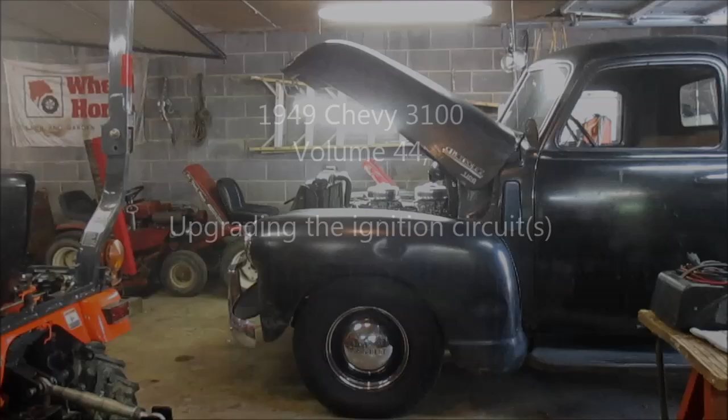Today we're going to get back on this 1949 Chevrolet 3100 pickup truck that has a 1954 235 engine that's been slightly modified and bored out to 244 cubic inches. As I hinted before, we're going to do a modification to this thing and perhaps get a little bit more out of it. So stay tuned and let's get busy.

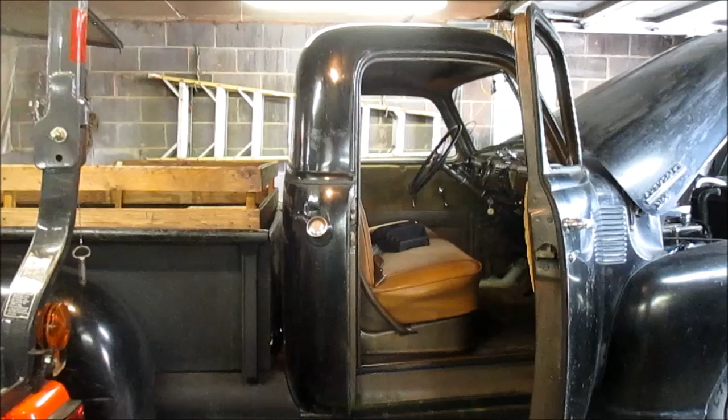And any of you souls that are still with me after that, I'll give you one more hint of an upcoming vlog. I had an aftermarket provider approach me that are going to want me to try out one of their products on the Chevy here. So I'm going to be doing that probably in the next two or three episodes, or vlogs. I'll tell you some more, but right now I don't know the full details of it. We're still in the talking stage. So as I find out more, I'll let you know. But that'll be upcoming, and it should be an improvement on this engine as we have now.

Well, all right. I've made a few hints about this, so I guess I ought to get right to it. My package came in today, and I've been communicating with the aftermarket provider. And I'll show you what I got, and we'll talk about it. Get that out of the way. And let's see. A little bit of paperwork that I've already gone through some. Let's see here. A Flamethrower coil. Very hot, okay.

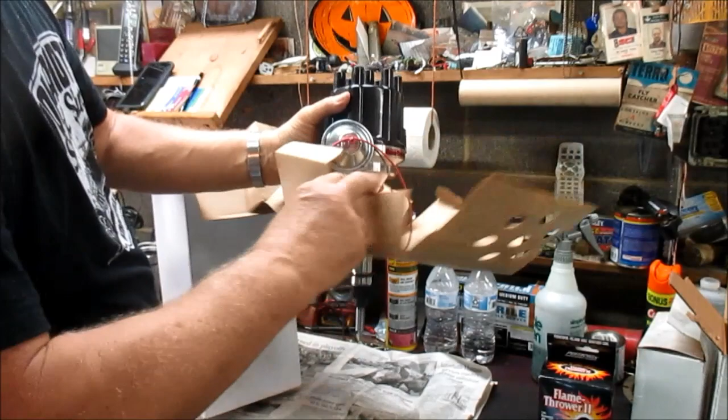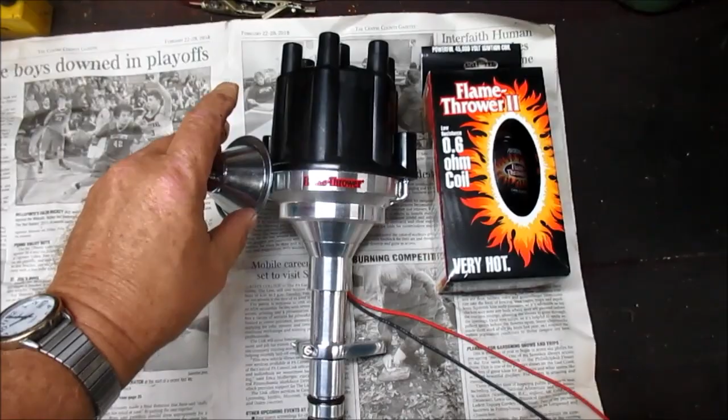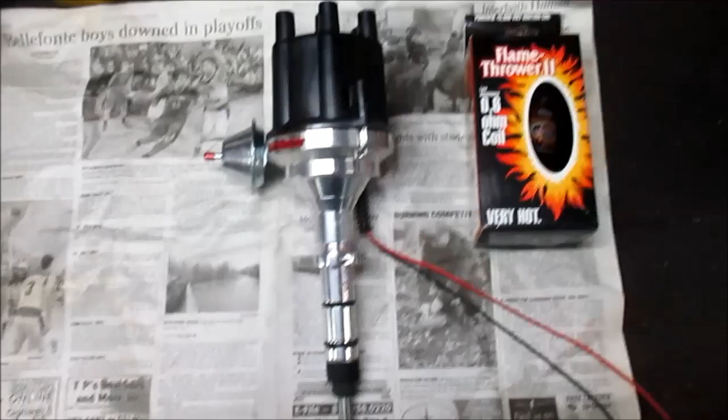And a new distributor, an electronic distributor designed to work with the Stovebolt series of engines. It's a Flamethrower electronic ignition distributor with the adjustable stop, and it's the Flamethrower 2 coil, high power coil, I guess. They did not include any plug wires, but this is good enough to get me going, and I'll tell you here who the they is. Alright, if you look there, you can see the electronics of it. You see it says Ignitor. Have you guessed who it is yet?

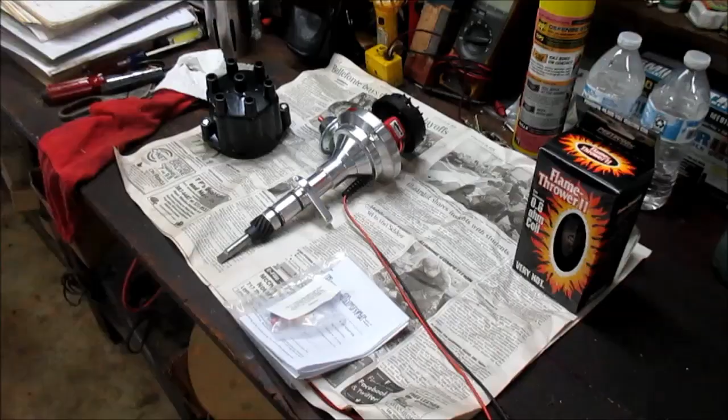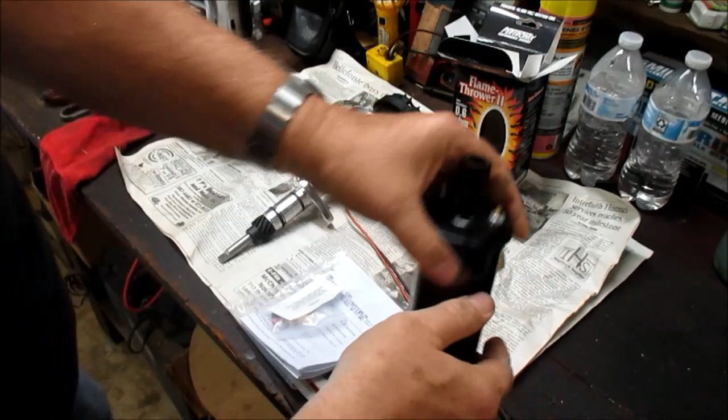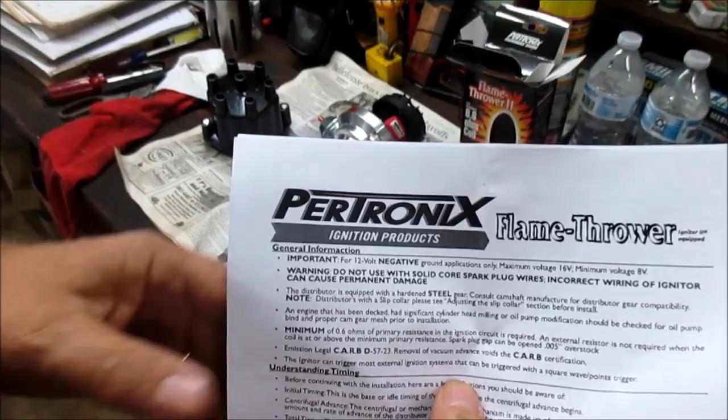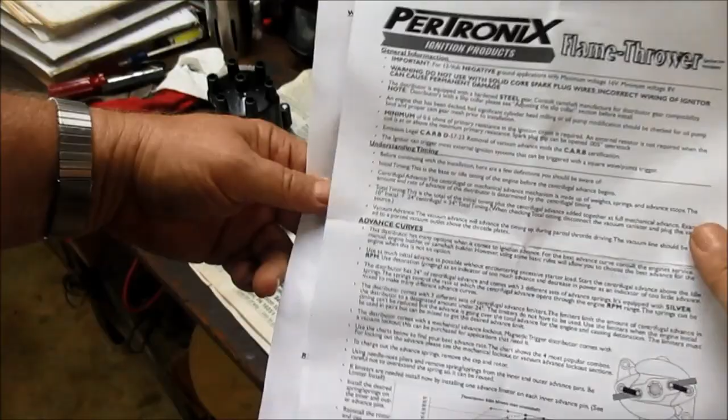Alright, let's unbox this coil and take a look at it. 45,000 volt. Okay, that's cool. It's good, and it's black. That'll go along with my color scheme. Marked correctly. Even comes with its own instructions. Good deal. And here's the paperwork that came with it. You ready for the big reveal? There you go. Pertronix. And there it is. Some of the paperwork that comes with it. Documented pretty good. It's not specific to the Stovebolt engines, but it's a good general that'll actually work with anything.

All right, as some of you may or may not be aware, I had a 72 Volkswagen Karmann Ghia that had the 1600cc engine that I went with a Compufire electronic module to do away with the points, and it worked fine for the couple years I ran it before I traded it for the 49 GMC truck. Well, according to their website, they own or make the Compufire modules too. So if this Ignitor 2 is anything as good as that, I should get some good service out of it.

All right, it comes with some really good instructions, and it's got this little kit with it, and basically it comes with 3 different sets of springs that control the rate at which the mechanical advance flyweights expand out and at what RPM. And they're color coded. They're silver, brass colored, and black. And it comes with the silver pre-installed, which is sort of in the middle. So that'll allow you to play with the advance curve if you so desire. And it also has limiters, and they're rated. I believe there's 3 different sizes that'll limit the amount of maximum advance that they will spread out. So that's pretty good too. And then you got some terminals.

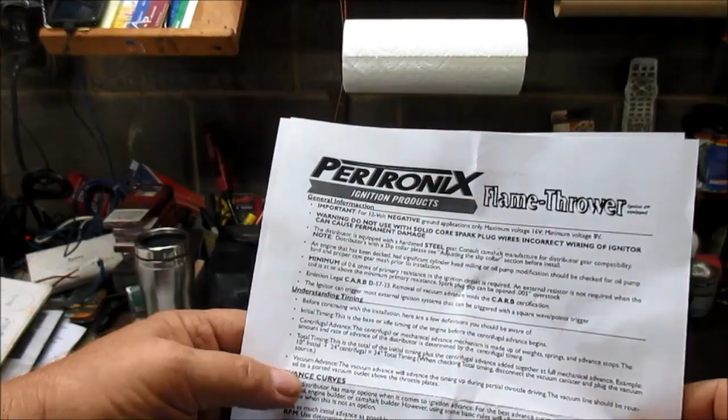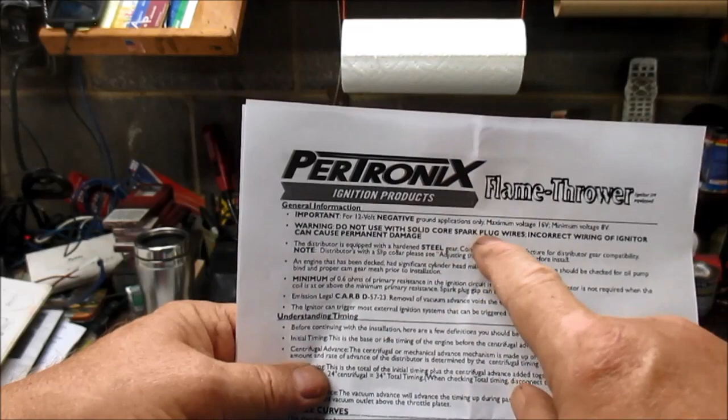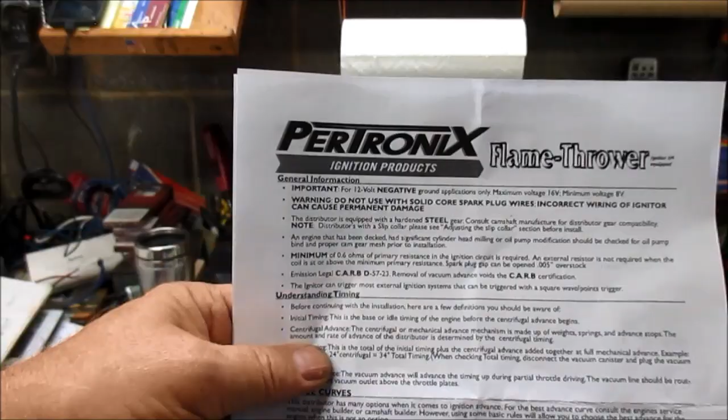So that's the kit. You know, it's a shame I don't have one of those Sun distributor machines, because I could really dial this thing in. But I think at this point I'm going to run with the silver springs that come pre-installed on it, and we'll go from there. Like I'm saying, the instructions are pretty good. There's some bolded type, which to me is kind of like the red that's in the Bible. You really want to pay attention to it. And in this case it says not to use it with solid core spark plug wires, and that's what I'm running. So I've got a set of HEI type plug wires coming as we speak, and I have another set laying around here spare I just discovered, so that shouldn't hold me down. But that's a big highlight.

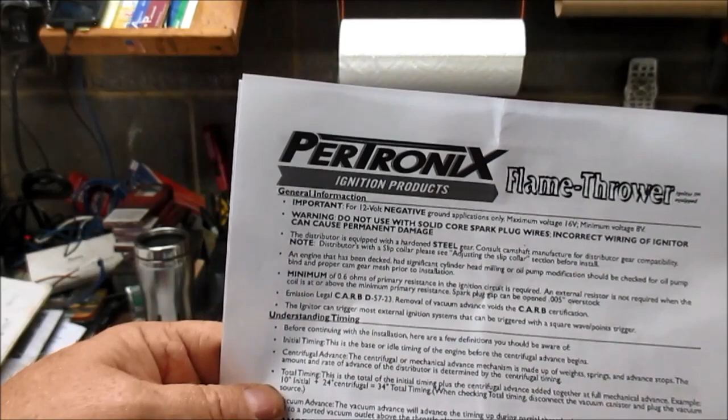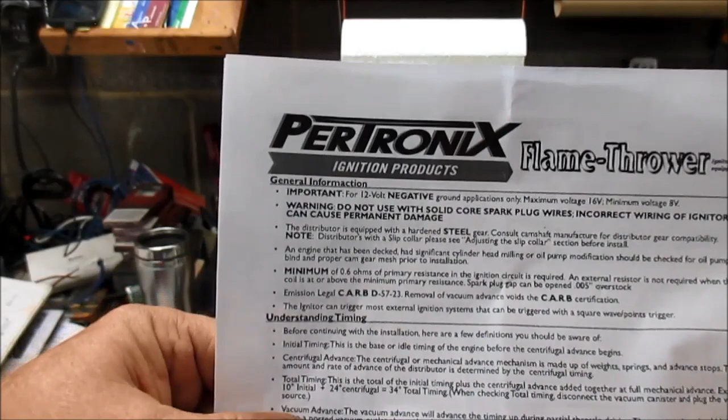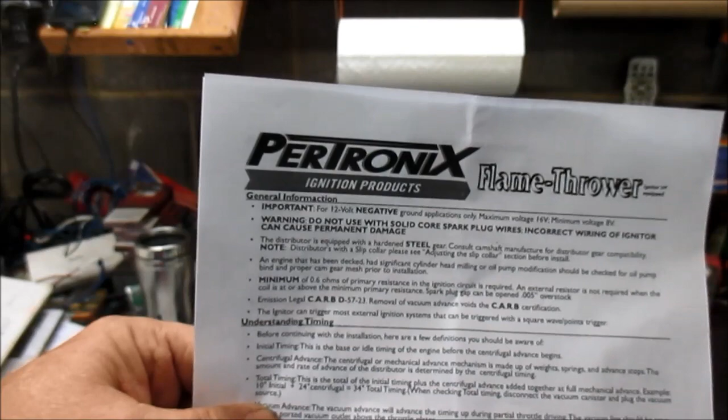And also there's a highlight right here, and it says the drive gear is hardened steel, which is also similar or the same as melonized. So I've done some research on that, and I'm going to pop up a graph that's going to show what the cam material is made of, which determines what gear the cam should be turning on the distributor. Now in 1954, well here's that graph now.

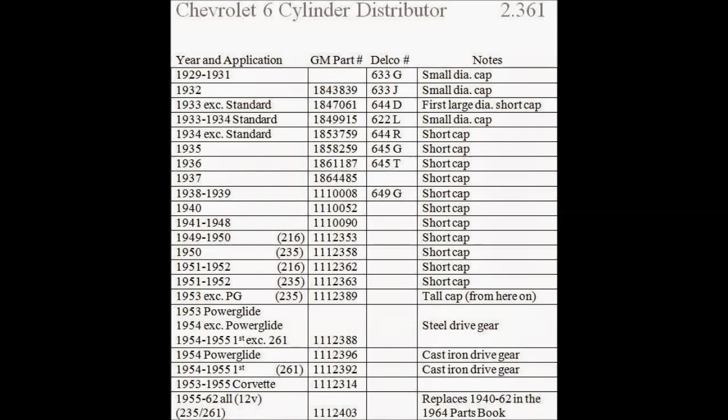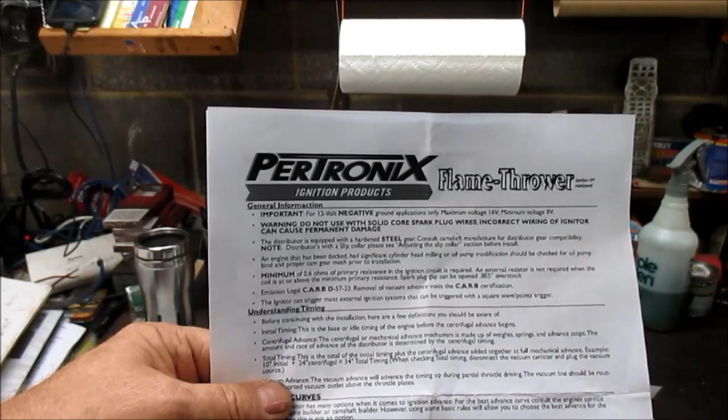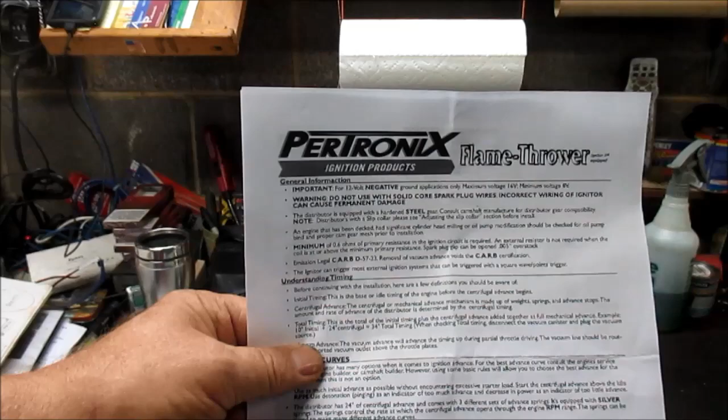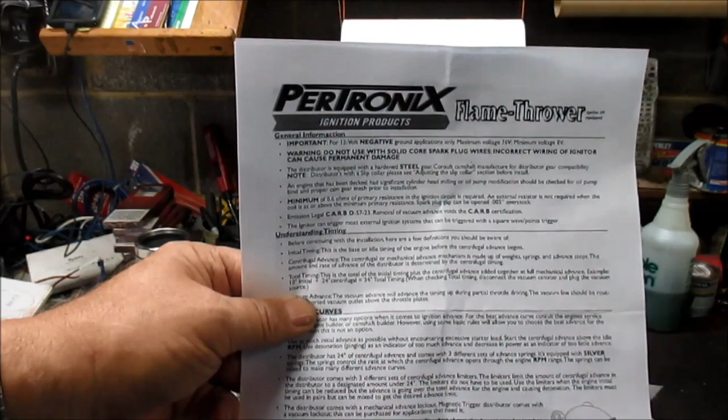Now, in '54 Chevrolet and earlier, Chevrolet used a steel cam, so a steel drive gear was used. In '54, the solid lifter truck engine used the steel gear, and the '54 Chevrolet car engine, which had hydraulic lifters, used the cast iron drive gear. Now, according to all the information I've got, and I'll post that up here as a little caption.

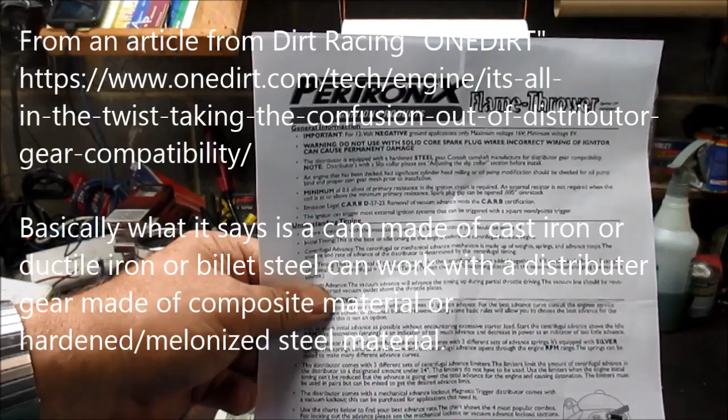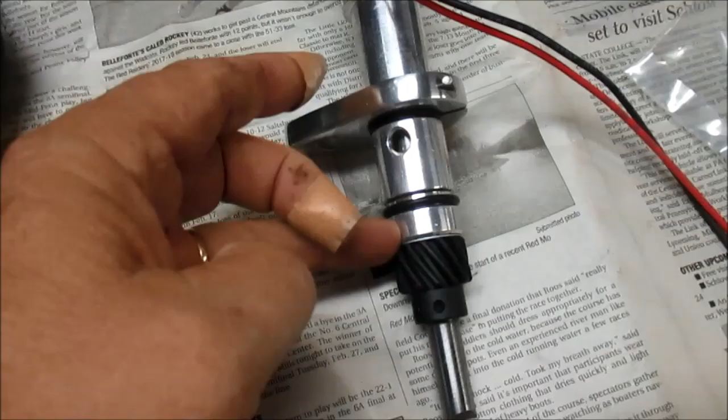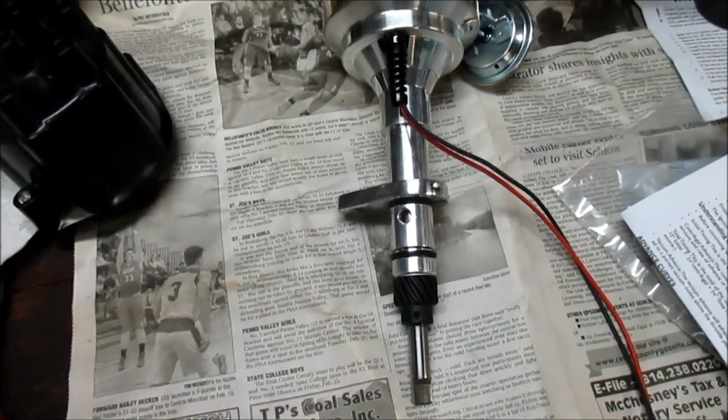The Pertronix, according to this, is the hardened steel gear, which is also the same as the melonized. And here's the gear here. According to all the information I can gather, the hardened steel or melonized gear can be used with the cast cam. So I don't see a problem running that.

But I also happen to have another distributor that I tried in my 235, and it wobbled, so I decided I wasn't going to use it, and I just rebuilt the stock one. But the gears look almost the same. Here's the Pertronix Flamethrower on the left, and here's the aftermarket rebuilt '54 distributor on the right. As you can see, the gears look the same.

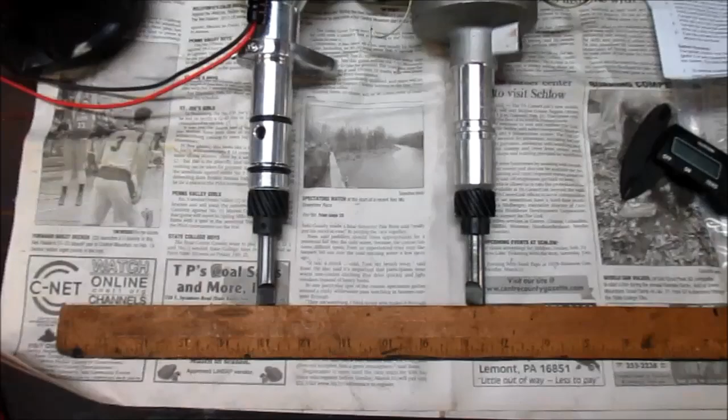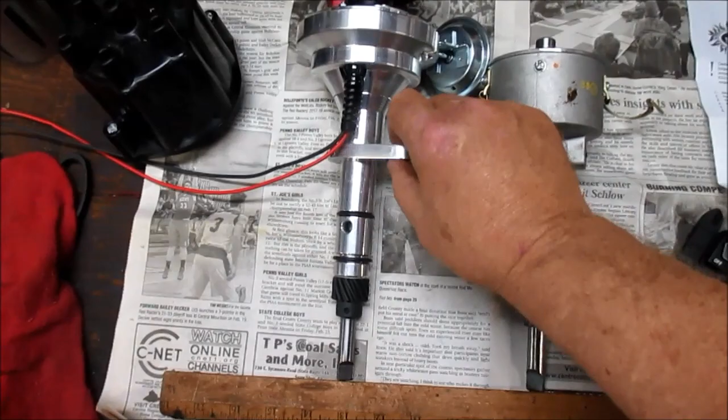I ran this all during break-in and testing of the cam, and I didn't have any problems with it. I probably got maybe 500 to 1,000 miles before I decided I'd redo the stock one, because it was just wobbling, and I didn't like the wobble. But anyway, I'm gonna do some measurements to make sure on the tang, and from here to here, and from here to here. This is adjustable, the stop, which is good.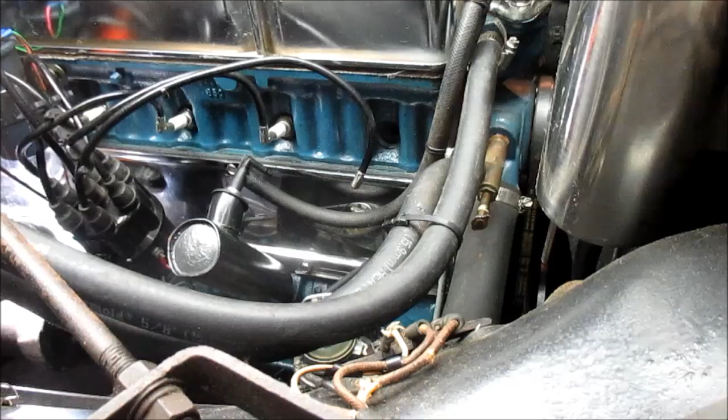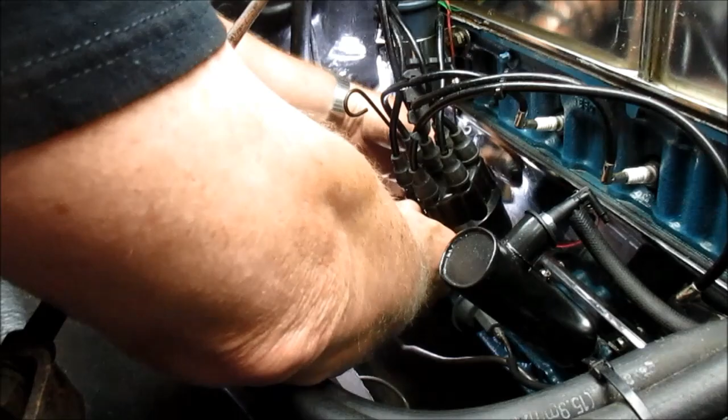Alright, the next step is to find top dead center on number 1 plug. There's several ways to do it. I believe in the easy way, so I'm going to let compression blow that out when I spin it over, and I know it's getting close. You can do it by hand, but I still got real good compression on this engine. Like I said, my fingertips are just shot on my left hand.

So, wow, it won't come off, did it? Right now, I just want to see how far I got. Well, it's almost lined up. I should be able to spin that by hand, because it's got to come to here, and it spins clockwise. Let's see if I can spin it by hand. Alright, I didn't show the procedure because I knocked the camera over, so it wasn't any good anyway.

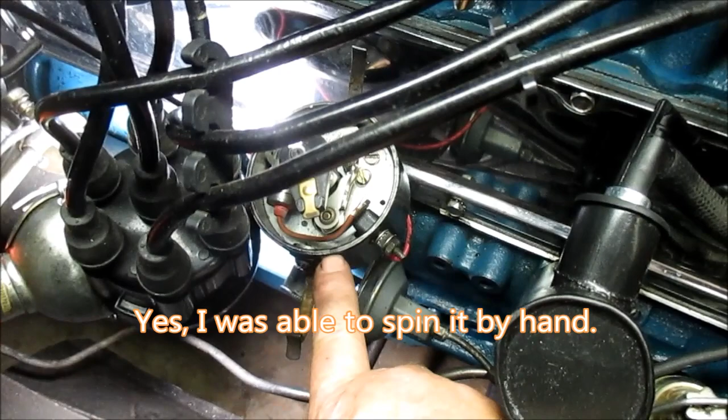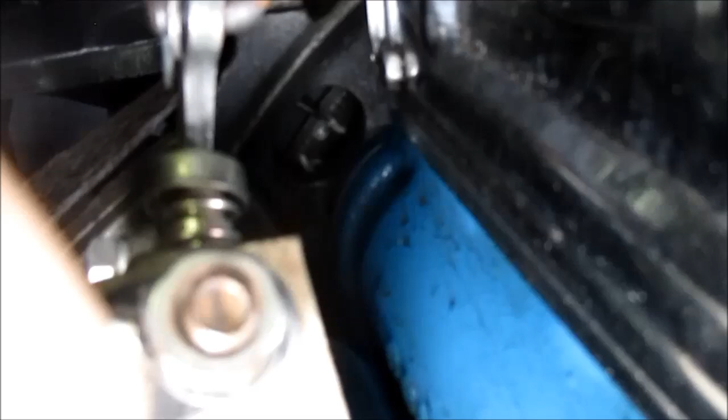But if you notice, I made a mark a long time ago on my distributor, so the tip of the rotor is lined up to number 1 there. And we'll come down over here, and I hope you can see that. The pointer is on the line. Now you see that white dot just to the left of the white line? That is the normal stock 235 timing setting, which is 2 degrees after top dead center.

Well, this engine's modified, and so that white line is true top dead center, or UC, I think they call it upper center, that's etched on the flywheel, but that's top dead center on cylinder number 1. We're going to set the distributor in off that, then we'll adjust the timing. Alright.

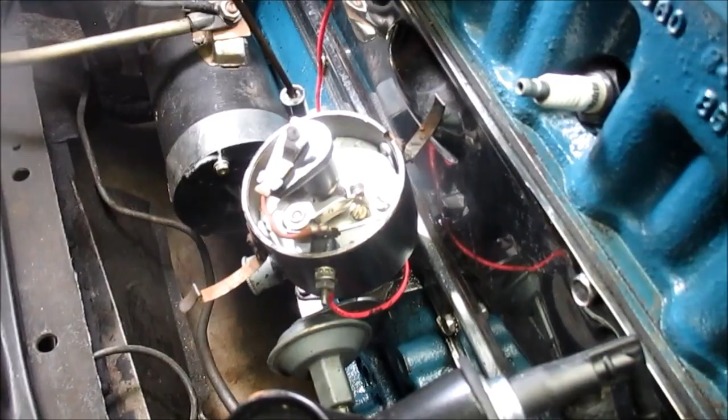Normally, if you're removing the distributor just to install the points, you would loosen this screw right down here and leave the vacuum advance assembly attached, and you can just slide the distributor out. But in this case, since I'm not reusing the vacuum advance or the distributor, I'm going to remove this octane adjustment bolt here and lift the whole assembly out. Alright, so 11/32 is the wrench.

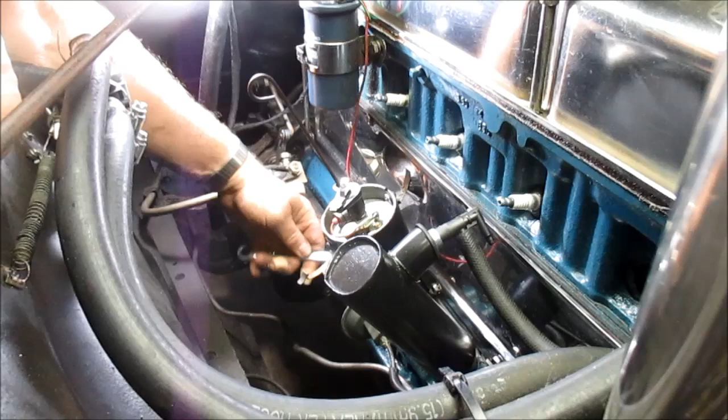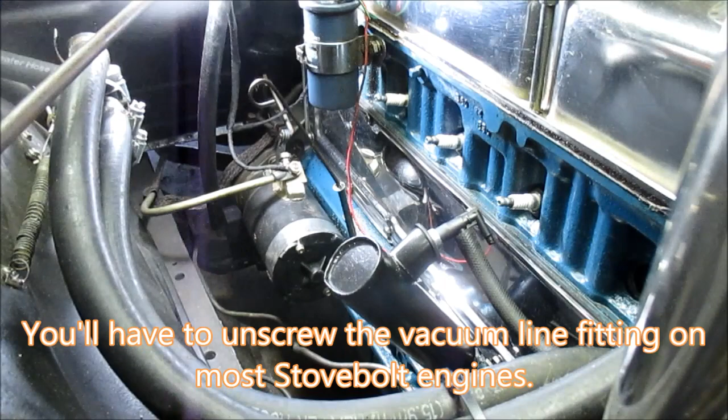Actually I could have taken it loose up here, because I won't be reusing that. Alright, I'll loosen this with my fingers. Alright, here we go. The tang will be pointing that way also. So we'll just unplug the vacuum, and out she comes. There's a bunch of oil on it. And look at that, that's a steel gear. That's the original gear that came on it.

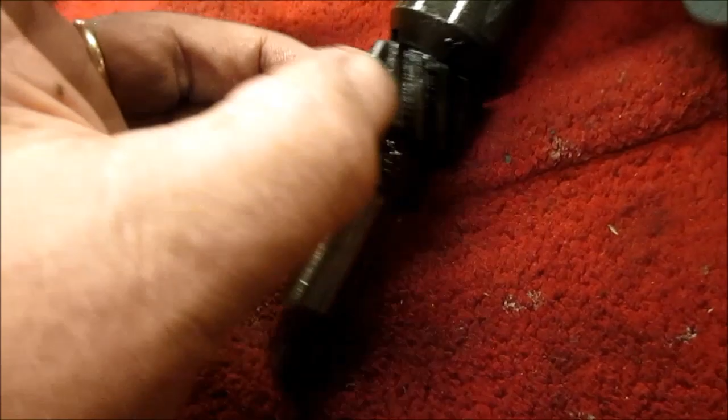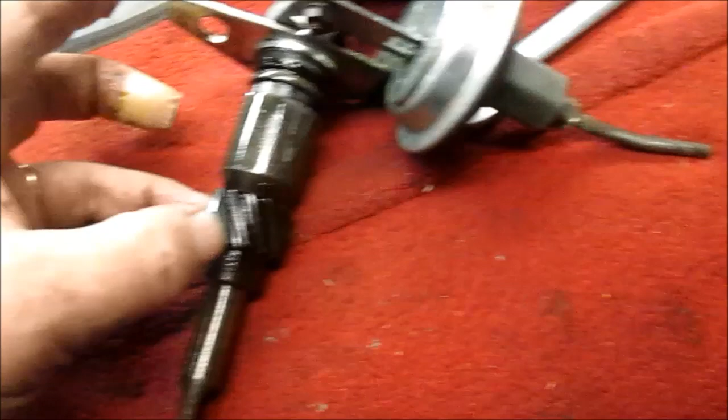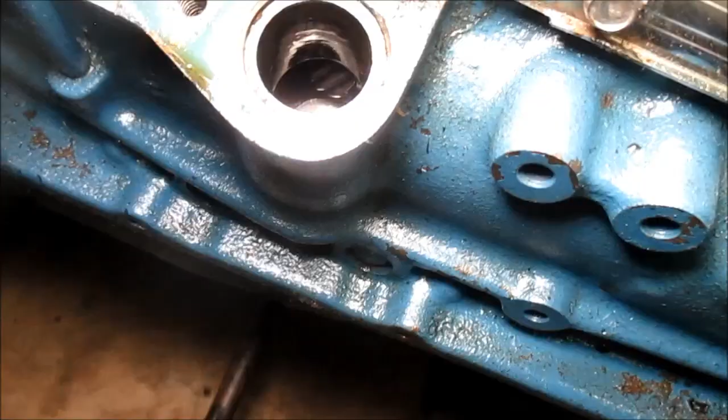Now, see, this is an aftermarket cam, so the possibility that the cam is forged steel is probably not. I think the 261s were cast, and this is probably a modified 261 cam, unless they cast it brand spanking new. I don't know what the aftermarket does. I'm gonna see if I can look down in that hole and see what the cam gear looks like. I doubt you can see, but it doesn't look eat up or anything. It looks okay, best I can tell.

Of course, I'm not seeing the whole gear, and I'm not going to spin it. So I believe we're all right. We're going to go with it anyway, because the gear on this '54 distributor that's in there stock has been running in it for a little over 3,000 miles now. I guess I'll know if I lose spark.

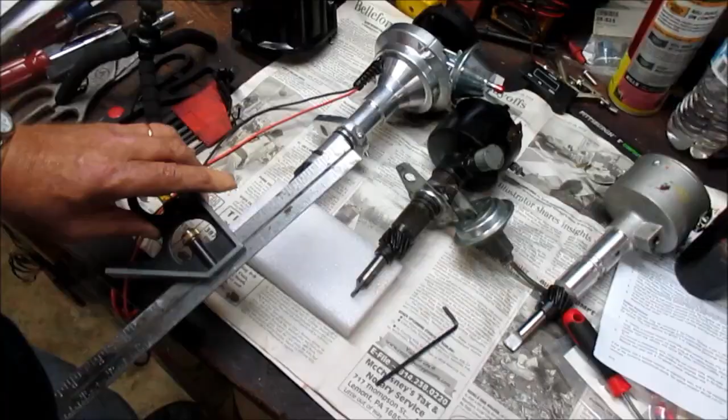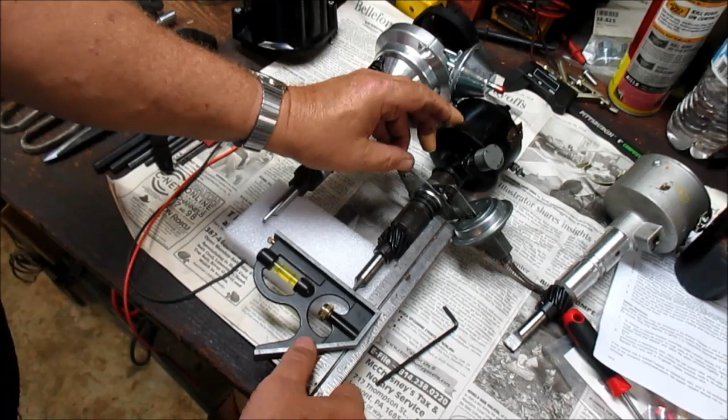Okay. All right, before I put it in, I'm gonna get a rough estimate. This is the distributor I just pulled out, and that's the flamethrower right there. All right, from that plate, the vacuum advance plate, loosen that up. He just doesn't hardly slide, does he? All right. There we go, right there.

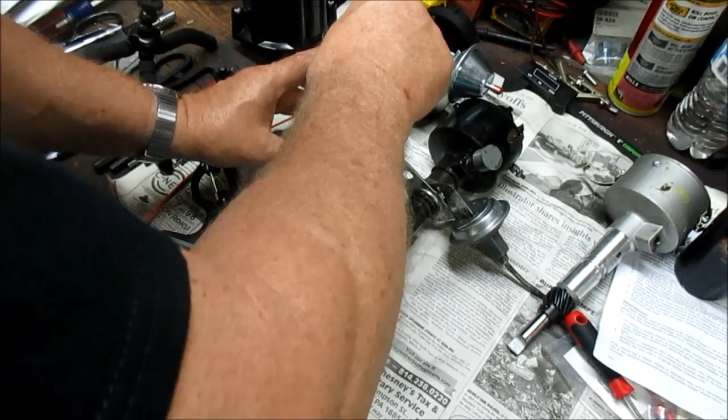Looks like it's about 4 5/8. 4 5/8. So, get 4 5/8 here. It'll be about right there. But I'm not going to snug him. What I'm going to do is just kind of snug him, not tighten him. I need 2 hands. Don't do it that way.

All right. I don't want him too tight, because I'm gonna do some adjustments while I'm over there in the truck on the engine. Otherwise, everything looks pretty close to being good. All right.

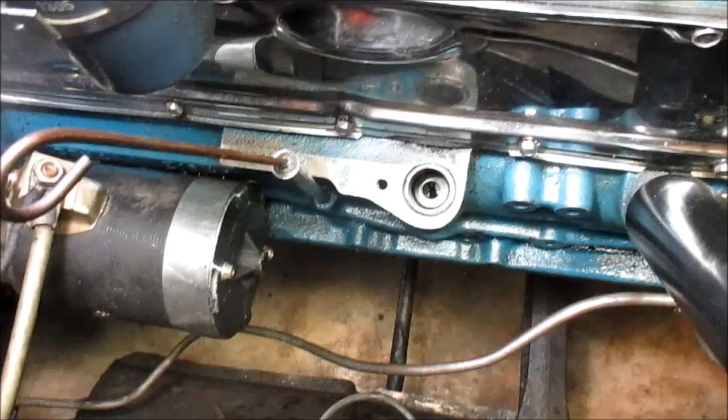First thing you want to do before you go to put your distributor back in is find out where the slot is, where the tang of the distributor fits in the oil pump. And if you look down there, it looks like it's at about 11 o'clock, 11:30, somewhere around in that vicinity. So that'll help when you get to line everything back up to install it.

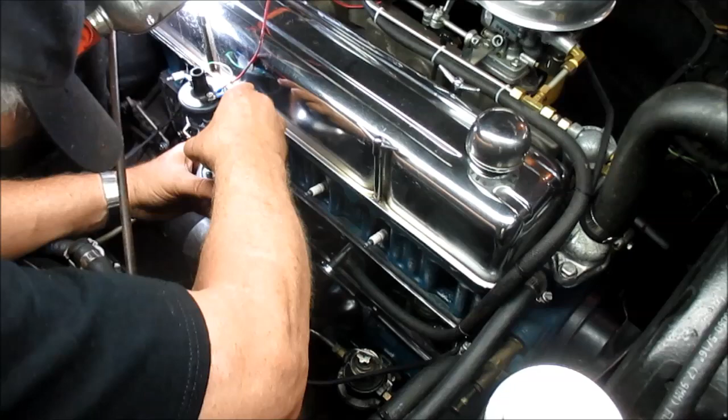Alright, let's see if we can get this thing down in there. Find out where my tang's at. I want my vacuum to point towards the front. My tang's at about 11, which does not help with my #1 plug. I want more like that, so I need to turn it almost to 12 o'clock. Alright, let me get a screwdriver.

You can turn the oil pump to do that. You don't want to get too crazy, but you can turn it. Turn real easy. Alright, it's almost at 12 now. Like that. Not meshing. That gear is not meshing with my cam. Alright, let's do some more checking.

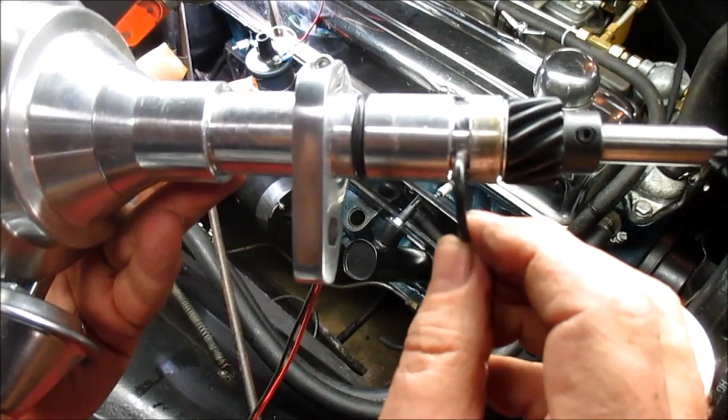Alright, we got to the bottom of why this was hanging up. See this thing right there? There was an O-ring, and this O-ring is what was keeping that distributor from dropping down in there. So let's try it again.

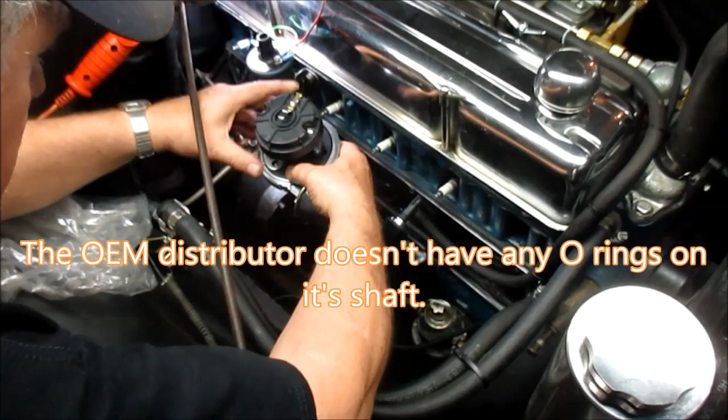Make sure you got your tang lined up, and the rotor is going to rotate counterclockwise. So once you get your gears stripped in, I want this aimed probably around that way. And there, that's over too far. Alright, I want my number one.

Maybe that's where he has to go, because he really engages there. Okay. So I'll have to put my number one right there. He's really down there. Turn it, make sure it's engaging. Alright. Close. Real close. I really want it pointing this way. Let's see. Let's try that again.

Go another two. It's just not going all the way down. You just don't want to go that far. You know why? I'll tell you why. Because it's the tang in that oil pump. That's it. So we're going to spin him. So he comes in right there. We're going to spin him a hair more. I want him where I want him.

Get moving tight. There should be plenty of adjustment there. If not, I'll come up with plan B. Make sure that clamp is good and tight. Alright. Don't want him coming loose. That should be plenty of adjustment right there.

Now I had to bring that out this way so it'll clear the draft tube, which is now my PCV tube. Okay. All right. Well, let's get the distributor cap. All right. What I've done is I've allowed enough adjustment to where I put a dot right here that lines up to number 1 on my plug wire, and I've got my rotor button pointing directly at it.

So that timing will be close enough to where I can get it started and running and get it warmed up. Then we're going to time it to max advance mechanical vacuum. Alright, so I've got it somewhat tightened down there. And I should have enough adjustment to get it forwarded. So now we're going to go ahead and get our wiring done, and we'll go from there.

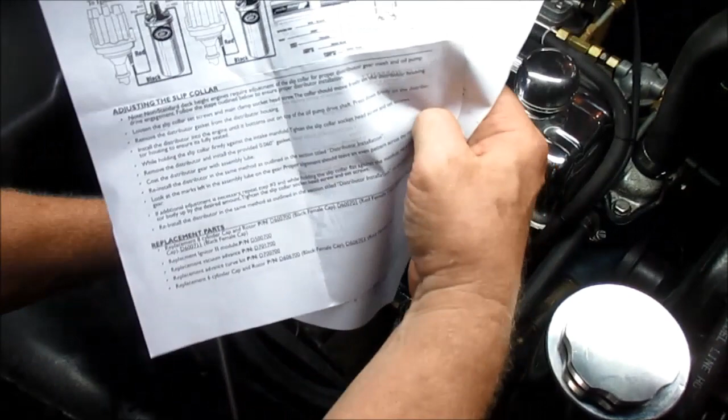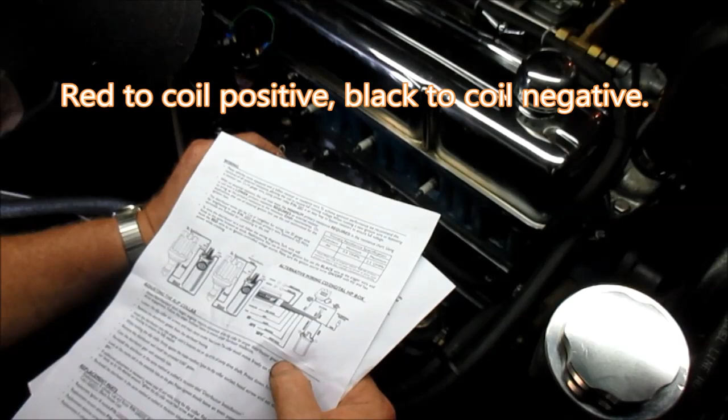They look like they're about the perfect length. All right, we'll see. All right, since they provided eyelets, that's what I'm gonna put on. So, looking at my instructions. Alright, the red goes to the ignition, and black goes to the distributor, or the negative. Alright, so I'll come around. There we go. The red goes to here.

That green wire is my coil, is to my tach. Okay. Out of harm's way. All right. Now let's wire the plugs in. I'm going to use these HEI wires. Guess I ought to put that #1 plug back in.

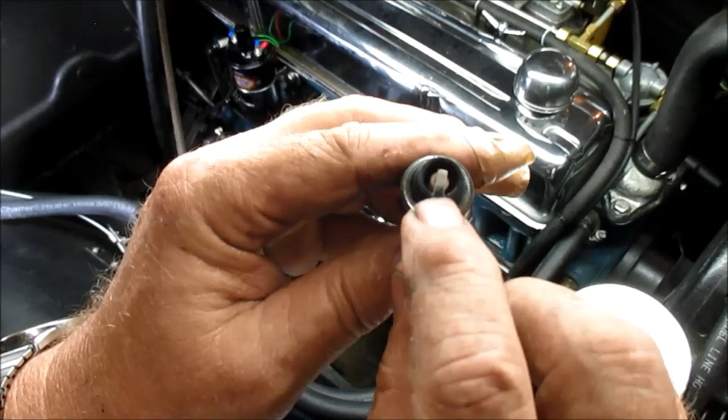Oh, I don't know if you can see, but the timing, look at that. It's right on the curvature of the electrode here. That's exactly where you want your timing at. So, of course, that's only after about a couple hundred miles.

See, I think these are solid core wires. Let me see. Well, I can't tell. I'm gonna guess they are. It's bolted. Do not use solid core wires. All right. So let's see. Number one. What's my longest cord? Well, this is just temporary anyway. So this will go to number one.

He's not going to want to stay. And he's incorrect. These wires aren't going to work. Son of a gun. Alright. Either I'm going to have to take a gamble and use what I think may be solid core wires, because these HEIs will not work. Okay. I have ordered a set of high energy wires to fit this. But I don't know when I'll get them.

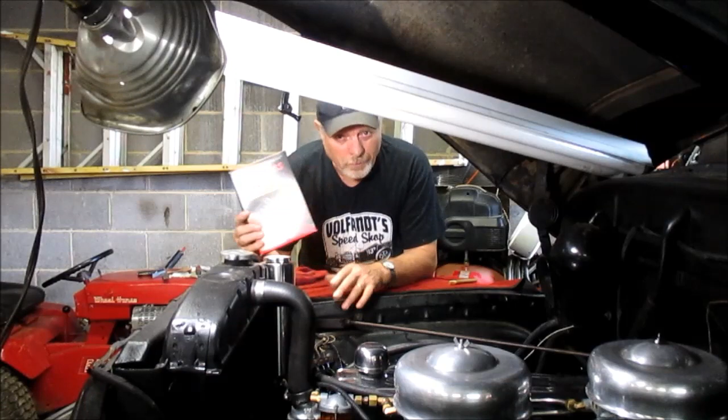Alright, it's the next day. Plug wires have come in. And to bring you up to date, I forgot to do this while I was recording the installation of the distributor. But I pulled it back out and I greased up the gear. I wanted it to have a good coating of grease where it meshes in with the cam gear, so it won't run dry until I get enough oil circulating around there.

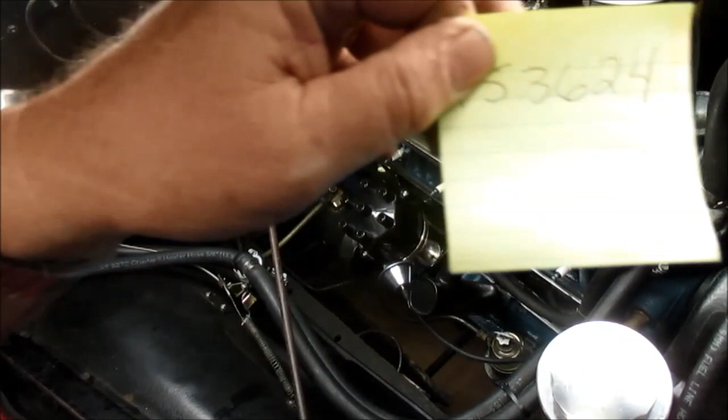So other than that, I've adjusted it a little bit more to where I've got it probably firing on top dead center around in there. So we're going to now install our plug wires and get ready to fire this puppy up. We'll see if we can't get it to, won't shake too bad. Here's your firing order. Let's see right there. 1-5-3-6-2-4. Yeah, we'll put them where I can see them. All right.

There we go. Probably clean them up a little bit. Yeah, okay. One, 5, 3, 6. I already got it swapped. 1, 5, 4. And 4. That's why you double check them, boys and girls. All right.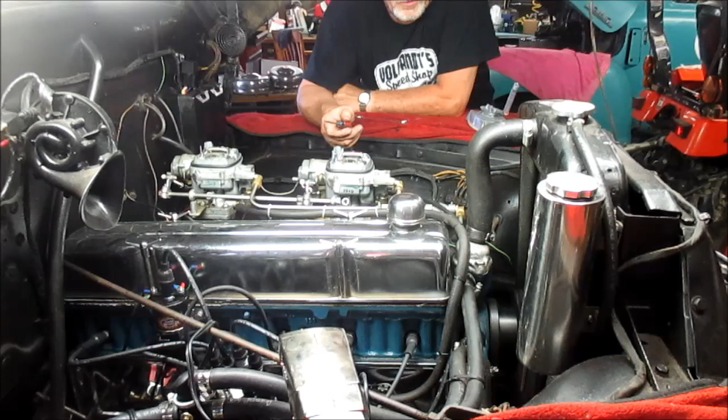Okay, I've got the initial timing now set at 12 degrees advanced at idle, and I'm trying to get a smooth idle at about 650 to 700 RPM. So let me see what my snail gauge tells me.

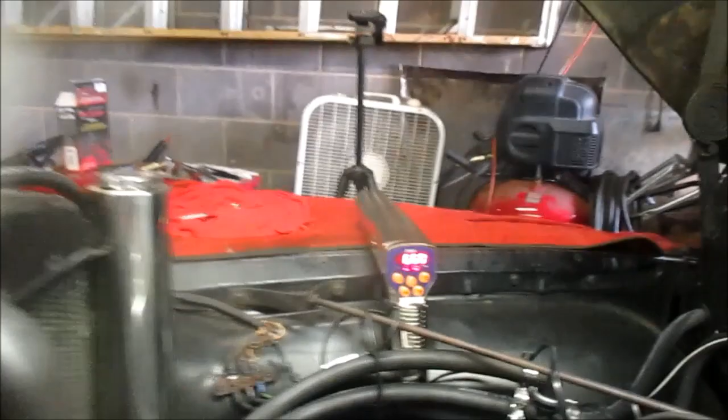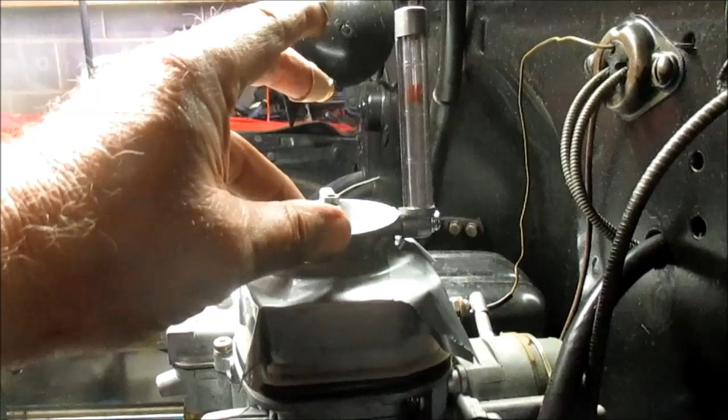Shift my light over a little bit. You can see there's the RPM that I'm shooting for. And we're looking at the Snell gauge. I don't know if you can see it, but there's the red. Yeah, I'm gonna go ahead and center him more. All right, so he's right on that center line. He's right on that center line. So both these carburetors are balanced good.

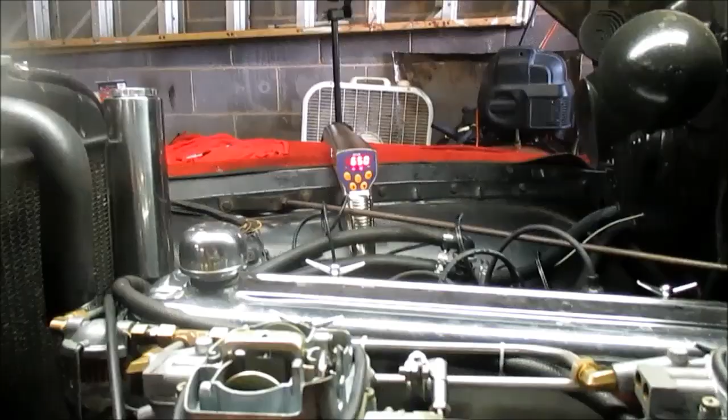And I'm sitting there at about 650 plus or minus 20 RPM, which is okay. We should not have any vacuum signal here. As you can see, I did not drop in any RPM. I'm not feeling any with my finger either. All right, that's good.

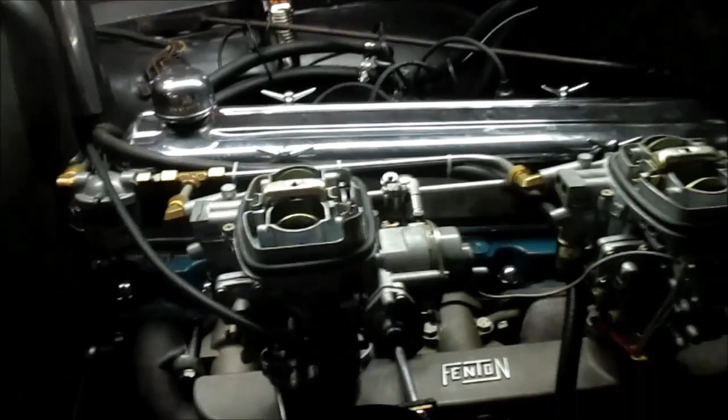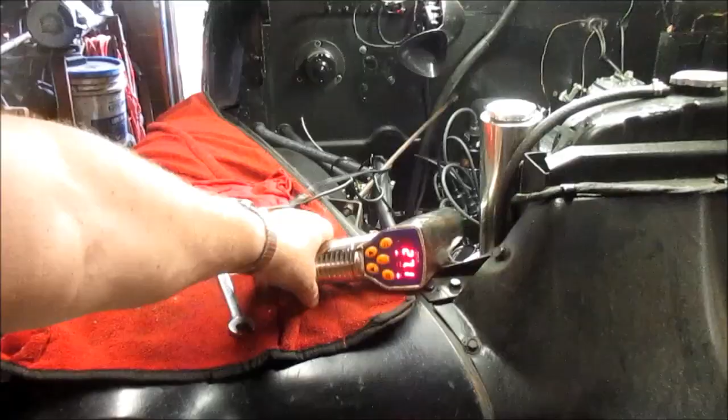Now I want to see what it is at max mechanical at 3,000. You probably can't hear me, but at 3,000 RPM, I'm looking at 27.1. And that's all right for now. I'll be back when it gets a little quieter.

Well, this light may be overwhelming it, but you can see right now I'm sitting at about 680 RPM, and it's really a whole lot smoother than when it was at 640, 650. So I'm going to leave it there, and I'm also going to leave that timing like that. Now I can advance it if I want to more, but I felt like with the stock distributor, well, let me see, I'll get right back to it.

Test. So far, so good. I'm not feeling no hesitation, no missing or anything. I'm gonna have a big hill I'm gonna climb here in a moment. Let's see what we got. I was hoping to hit it rolling. Alright, going up the hill.

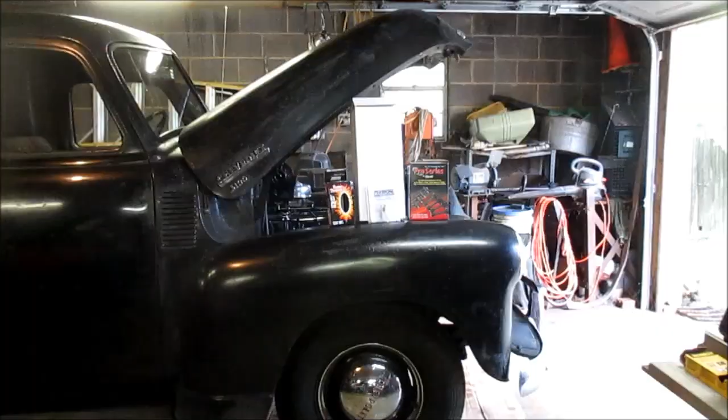All right, I just got back from probably about a 15-mile little run. Put it under load going up a hill. I ran up to 60. And I even cruised around a little bit at 30. And right now, it's really set good and it's running real good. As a matter of fact, I need to run it some more to be 100% sure, but I'm going to go ahead and say that I've gained 100 RPM. In other words, I'm doing 50 mile an hour now at 2,800 RPM when I was at 2,900 RPM with the OEM distributor and setup.

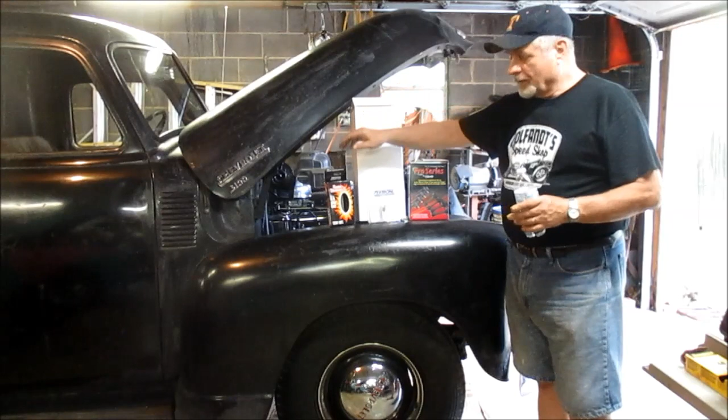Now, granted, I've got an electronic distributor, I've got a new high power coil, I got new plug wires, okay? But it's still the same plugs, still the same carburetors, still the same ethanol gas, and I've actually dropped 100 RPM, so that's pretty good. I'll know more when I can get it out. Right now the traffic's picking up too much, people getting off work and everything, and I couldn't really get it out there to run it some. And I don't like to run in traffic, if you know what I mean.

But anyway, so the bottom line is, with this Pertronix Flamethrower 2 high voltage coil, Pertronix Flamethrower electronic distributor ignition, and these Pro Series plug wires, I was able to drop my timing from 13.5 degrees at idle down to 12, and my 3,000 RPM, what used to be my maximum mechanical advance, from 30 degrees at 3,000 RPM. Now with this distributor I'm at 27.5, and it feels like it's got more power. So anyway, I'm pretty happy with it.

Of course, now longevity, that'll be the thing. I ran it, you know, I idled it pretty good. I got it up pretty hot, so that distributor heated up, and I was out there running it hard. So I'll know more as I go, but at this point, I'm going to give this a thumbs up. So far, I don't see any leaks around the distributor, no problems. Everything seems to be good. Well, anyway, I like it.